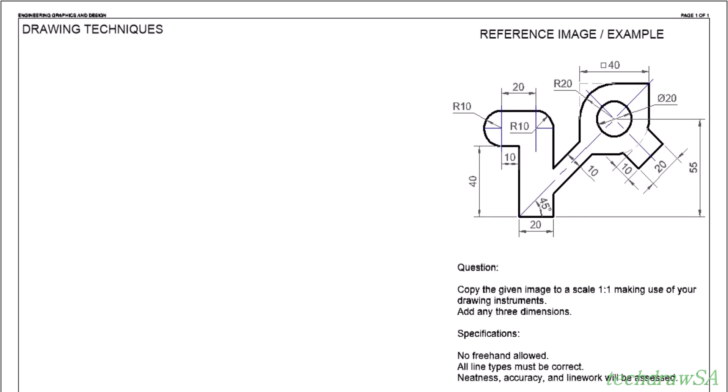This is another DoubleCAD training session, and you can also draw along with me on paper using your drawing equipment. You can use this as a CAD lesson for DoubleCAD, or you can use it as an additional exercise on paper. Let's start.

As always, we are going to make sure that our layers are set up correctly, and to do that we're going to go to Options and Drawing Setup. We have already spoken about these in previous videos, so you can go and look at my previous videos to see the default settings that I use. As they are set here, I'm going to leave them. Most importantly, I'm going to make sure I'm in the metric system, that my scale is 1:1, and that's an absolute type. Units is millimeters, everything is millimeters. For my purposes, I'm using a precision of 1.

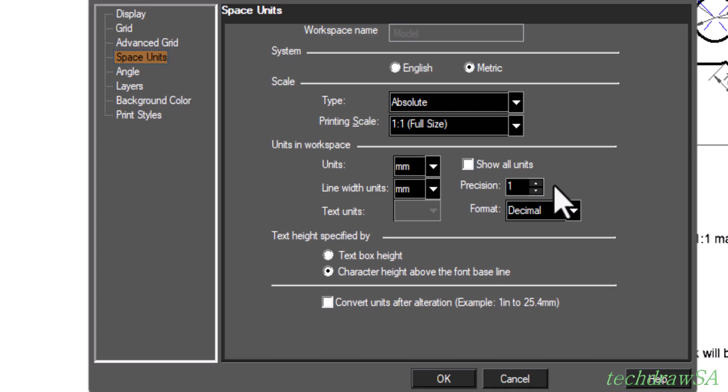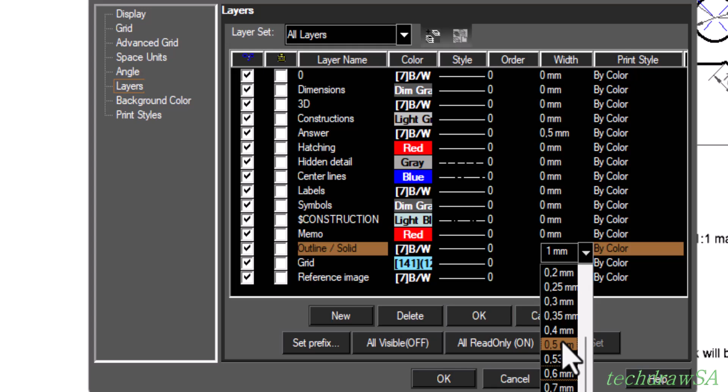Now I'm going to go to angles, layers, my most important part. Here I just check that I've got all the layers as I require them. As I've said in my previous videos, make sure that your outlines and your solid lines are set to 0.5. I set mine to 1 during this recording so that you can see the difference between my solid lines and my construction lines that much better. But for your purposes and for printing purposes, you will make use of a 0.5 line width, and I'm gonna say okay.

Here in our canvas, the one thing that you should start off by considering is the workspace that you have available on your paper. This template I've drawn is 420 by 297 to represent the outline edges of a normal A3 paper, so if I were to print this out onto A3 paper, my settings will be the same as that of the actual paper. Therefore, in our open space here, which we refer to as the drawing space, we must make sure that we will fit in our drawing both in the width or length as well as in the height.

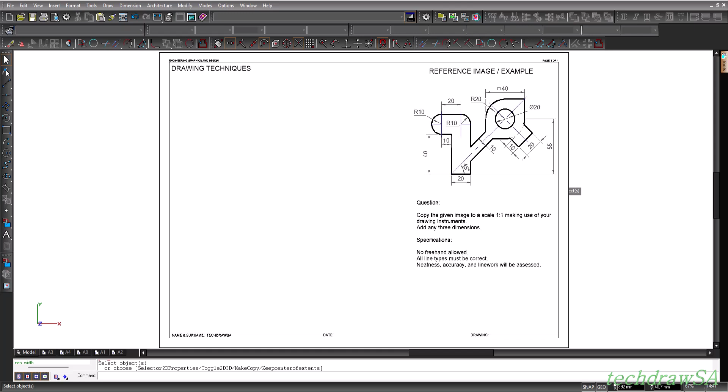If I look at my measurements given on my question, we can get an idea, although with some questions there are distances that would not give us the total length or total height, and you have to infer that from the information provided in your drawing. Let's use an example. If we look at the full length or width that this drawing would use up on our canvas, we can get a general idea so that we have enough space.

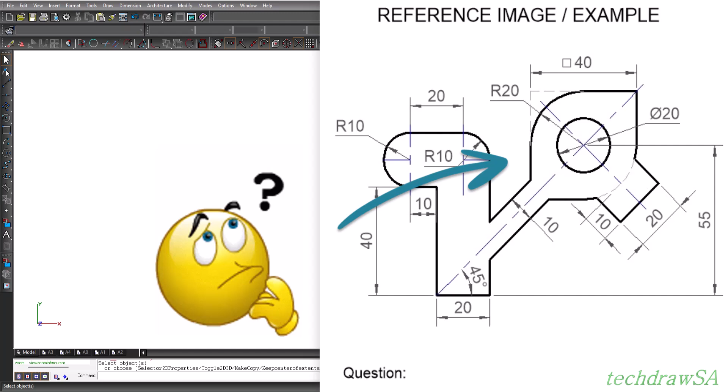Firstly, it's this 10 millimeters for the radius of this rounding, then another 20 millimeters for that elongated area, which gives us a total of 30. Another rounding gives us 10 millimeters, so 30 plus 10 gives us 40. Then there's a measurement here that is not defined as such. But using this angle and this height from the dimensions, we can get a general idea of what that distance could be, although we must estimate it for now. This could be anything between 15 to 20, and to be safe, I'm going to say roughly 20, although I know it should be a little bit less.

So we already have 40 millimeters from the dimensions provided, and now we add the other more or less 20, giving a total of 60 thus far. Then we have a square type shape defined as 40 millimeters, so that plus the 60 is 100. And then we have an extra bit here which we can safely estimate at least 20 millimeters. It might be less, but let's work with 20. So from the far left rounding to the far right corner, that's more or less 120 millimeters for the length or width of this drawing.

For the height, that's a bit easier. We have a defined 55 millimeters height up to the intersection of the center point of the circle. We know that the square is more or less 40 by 40, and we will then have more or less 20 millimeters from the center up.

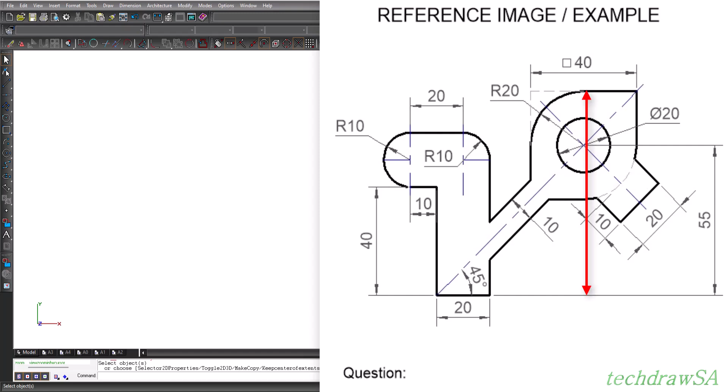So we can safely assume if we say 55 plus 20, we would get to 75. But let's be safe and give ourselves a little bit more room because we still need to add dimensions properly. And therefore, let's just make it for what it's worth, 55 plus 25, and that will round it off to 80. So we have a total length / width of 120 and a total height more or less of 80 millimeters. Those are the estimates that we work with for this.

So when we start our planning, we're going to start with a vertical construction line. We don't want to start too close to the border line. Now, I always say more or less 20 millimeters away from it should be safe. That gives us room for dimensions as well. So I'm just going to more or less place it there. And then I'm going to draw a horizontal construction line, also enough space from the top down to give me room for dimensions that I might need to add, and I plot it down there. Those are two light construction lines that I would draw on my paper as well as on my CAD canvas.

Now that I have a reference point to start off with, I'm going to use the circle tool as I always do for my measuring. And then from that intersection, I'm going to go and measure at least the 120 millimeters that I have more or less determined. That is for the total length, and that shows us that we have more than enough space on this scale of 1:1 that is required to do this drawing. And then the height, obviously, if we see that there's 80 millimeters, so we will definitely have enough space. So we don't even have to measure that out now unless you want to for purposes of starting from a starting point. So let's go about doing that very quickly.

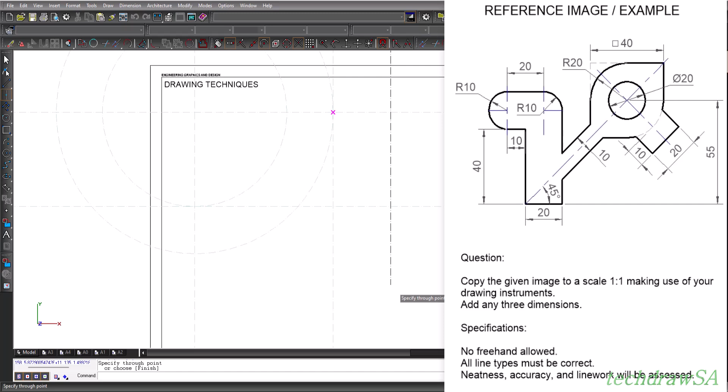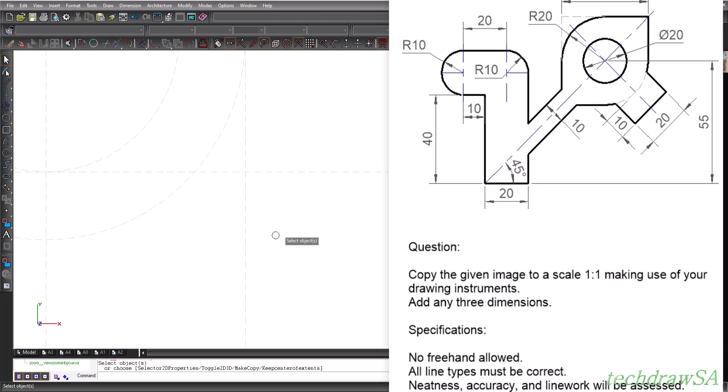So let's take a look at the question. In the question, it says here, copy the given image to a scale 1:1, making use of your drawing instruments and add any 3 dimensions. And then the specifications are that no freehand is allowed. Obviously, on your paper, you will have to make use of your drawing equipment. And all line types must be correct. So your center lines, your construction lines, your solid outlines, your hidden detail if required, dimension lines, everything must be the correct line types. And then finally, neatness, accuracy and line work will be assessed, as is the case in all technical drawings. And if we look at our reference image / example image, we now also have a very clear idea of where we will start and where we will end.

So for here, it actually depends on your preference where you would like to start the drawing. I like to look at what are common features that will give me a quick start and that will actually help me with my workflow to continue with my dimensions in an easier way. Now for me personally, you can find it a different way. There are 2 places where I think can be a good start in this drawing. Either the bottom left hand corner where this 45-degree center line starts, or the intersection here at the circle where our 45-degree center lines meet at the center there. That could also be a good starting position.

Now, in some exams or tests, those starting positions will be given to you and you will have to start from those. If it's a clear and open canvas like the one we have, then you can start wherever you like. Now, some people might choose other starting reference points, but I'm going to decide on one of those 2, and I'm going to for this purpose start with this one over here at the bottom left, because I have now easy access to this 45-degree angle that will lead me to the second part of the image, and I also have a starting point then for the rest of this first part of the image on the left hand side.

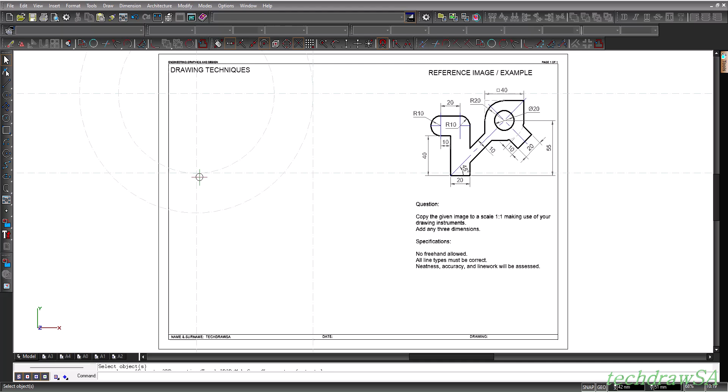So now if I decide to do that and start with the starting point, I need to look at my measurements to know from the measurements that I have determined here on the bottom left, how far must I go inward. So obviously if I were to go and draw a vertical center line here on that reference image, this distance from there to there is what I need to determine.

So that is easy because we already have that 10 millimeters up to the center point of that arc that we have there, and then there's a total of 20 up to that center, and from the proportions we can see that that's a 10 and 10 millimeters, which means we will have a 10 millimeter to the center point plus another 10 millimeters, and that gives us the 20 from the far left to that starting point. So for me that is a good starting point, since no other starting point has been provided.

So now what I'm going to do is, back here at my canvas, I'm just going to draw a light construction line, because I want to get rid of these other lines, because these arcs are going to interrupt and interfere with my planning. So therefore I'm just going to select the line tool, and I'm going to select the constructions layer, and I'm just going to draw a light construction line that is the outline or perimeter of my drawing for the time being. Remember, this is just an estimation. This is not necessarily the accurate distances.

And then once I've gotten that, I know that's my workspace in which I would do my drawing, and I'm going to go edit, clear all constructions. Now, not everybody will do it this way. Sometimes you will just draw a construction line to get yourself these two reference points on the Y and the X axis. That all is your decision.

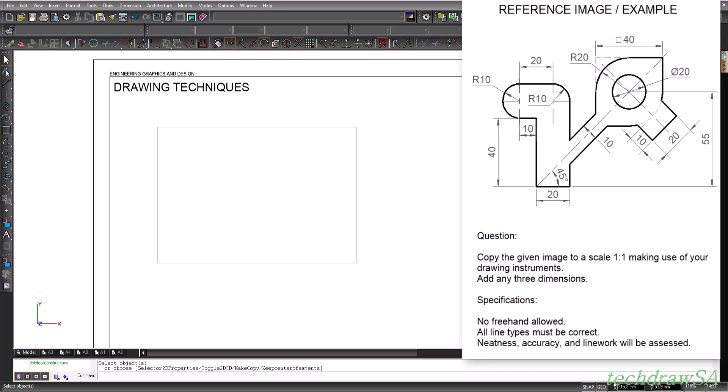So now that I have this far left distance, I know that I want to go increments of distances from left to right, and what I'm going to do is I'm going to plot construction lines from left to right for this first part of my reference image on the left hand side. And for that I'm going to go to my circle tool again to measure off. I'm going to measure off 10 millimeters, and I will do that a few times more. So we have 30 there.

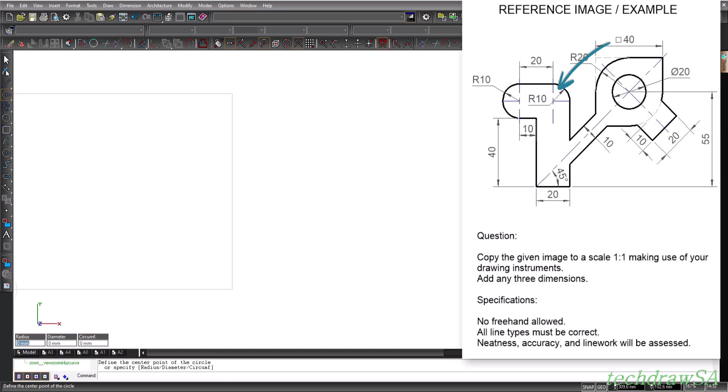If we look at our reference image, there's the first 10 millimeters, the second 10 millimeters, and then I need another 10 millimeters to that center point of this round arc here. So that means 10, 20, 30, 40 in total. So I'm just going to do those for the time being, not too many. Just want to use the necessary construction.

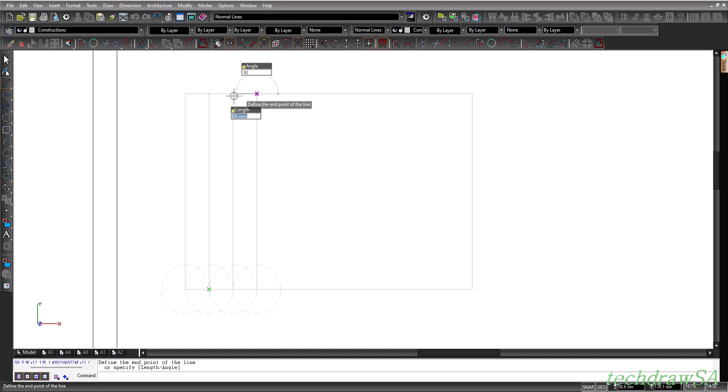So now that I have those reference points, I'm going to go and draw in light construction lines, vertical construction lines. That is going to just be my guide for when I do my measurements. So I don't need all these lines or the full length of those lines, but for the time being, this is just the way I like to draw and plan out my layout of the drawing. Once I have that, I know I've got now the 10 millimeters.

This is just to help improve my workflow, and immediately when I've done that, I just want to remind myself of this 45-degree center line that I have. That's going to go indefinite for the time being, and that starts at this 20 millimeters from the far left inward. So therefore I'm going to go here to where that line is. I'm going to select my line construction tool, and I'm going to immediately select the center lines layer. So that is then on this reference point, and I'm going to zoom in properly so that I can snap there, and then let's zoom out.

I'm going to just stretch it indefinitely for the time being, and my angle I'm going to say is 45 degrees, and I plot it down and escape out of that. The properties of the center line I will adjust later when we reach that stage. Now I know that's there, and I know that I can start with the left hand part of my drawing.

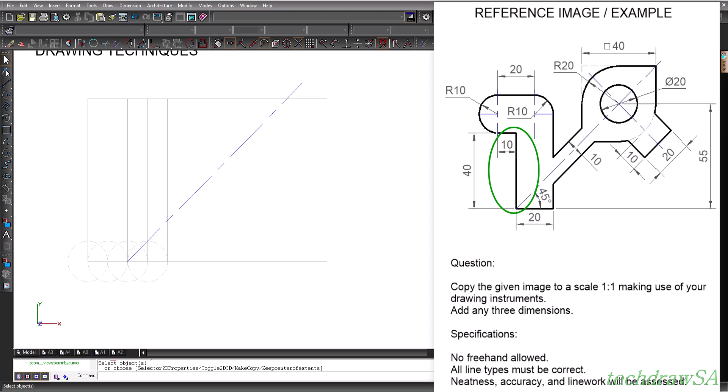And for that, I know there's a solid baseline of 20 millimeters that starts from the starting point to the right, and I've got the 40 millimeter height. That also is a solid, uninterrupted line upwards. So for that, I'm going to measure out that 20 millimeters as a solid outline. So I'm selecting the line tool, and then I'm selecting my correct layer, which is my outline and solids layer. So from that starting point, 20 millimeters to the right, and I escape out of that. So there I have the first baseline.

Now I want to go 40 millimeters up as per my reference image. So if I look again, always double check that you are using the right measurements of 40 millimeters, and therefore I'm again going to use my construction tool, circular construction tool, to measure the height of 40 millimeters.

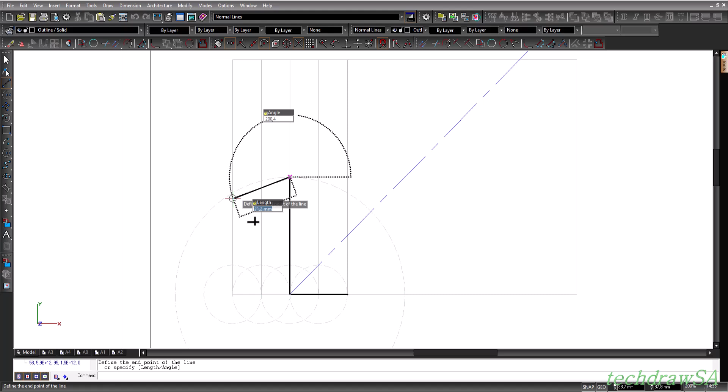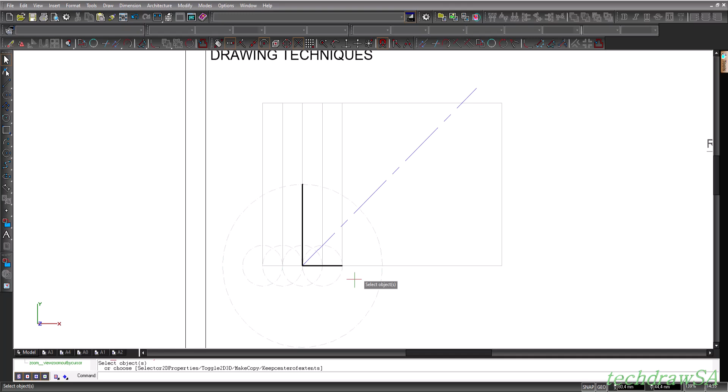Once I have that, I can immediately go to my line tool and immediately measure that height of the line and escape out of that. So there I have two solid outlines already. Now remember, you would draw this on a 0.5 millimeter thickness on your CAD, and on paper this will be a nice solid outline, A-type line, and then you can draw this either following me here on CAD or on paper. Now let's go to the next distance.

The next distance is straight out 180 degrees at a distance of 10 millimeters at that 40 millimeter height. You can either draw the guideline for your construction here, or you can just draw the 10 millimeter solid line, which is what I'm going to do. By the way, if you have your selection active and you have your line tool active, make sure that you are still on the correct layer.

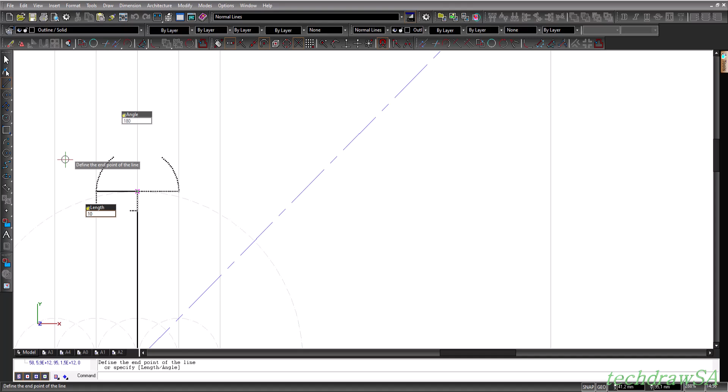And if you want this line to go out straight horizontally, you just hold in the shift key and just drag. And then once you are happy that's the right angle, which is 180 degrees, you can just put in the distance of 10 millimeters and enter. There we have that part now, and I'm going to escape out of that. So now I've gotten all of this so far.

Now we reach the point where we actually have an arc. And we know that arc has a radius of 10, which means it's a diameter of 20, which means that from this line here, we will have 20 millimeters up to the top. And that means that we have up to the center only 10 millimeters, so we can determine those distances already.

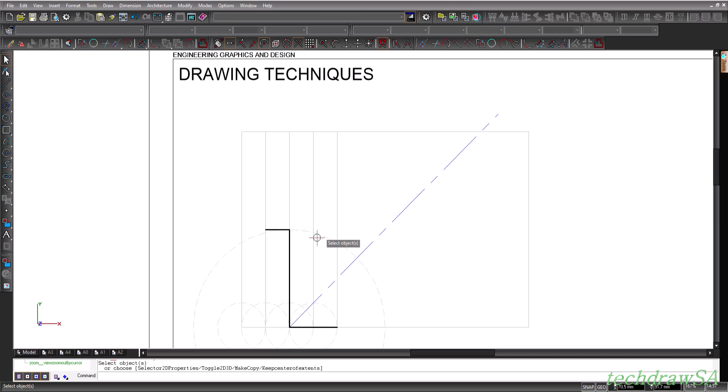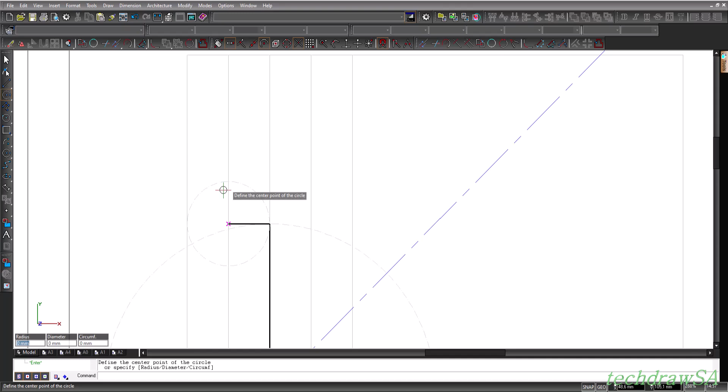So coming back here to our answer, I'm going to measure now on these guidelines, and this is part of the reason why I like to draw these light construction lines as guidelines, because in CAD you always need reference points, and this just makes my job a bit easier. So I'm going to go to this reference point here, and I'm going to measure up 10 millimeters as a radius for my first measurement, and then 20 millimeters for the total height of that round. And that gives me a reference point for the center point as well as the top.

Once I have that, I'm going to make use of my horizontal construction line tool and use that as a guideline for the time being. Place it there, snap it to those reference points, and then I'm going to use my line tool. I'm going to make sure it's on the constructions layer, and I'm going to draw two light construction lines out to the right, indefinite in length. And I'm going to do the same with the uppermost part, also out to the right, indefinite in length. We're going to clear that up later.

Now that I have that, I know this will be the center of my rounding, which is the center point that I see here on my reference image. So I'm going to take that middle point, and I'm just going to draw in that 10 millimeter radius arc. Now that I have these distances for the rounding, I know it's 10 millimeters to the center point and then another 10 millimeters to the uppermost.

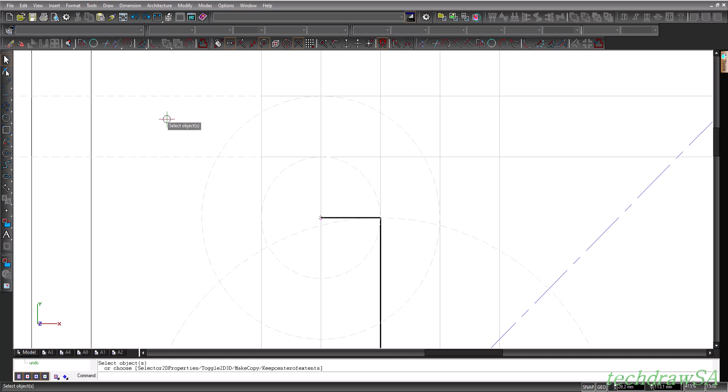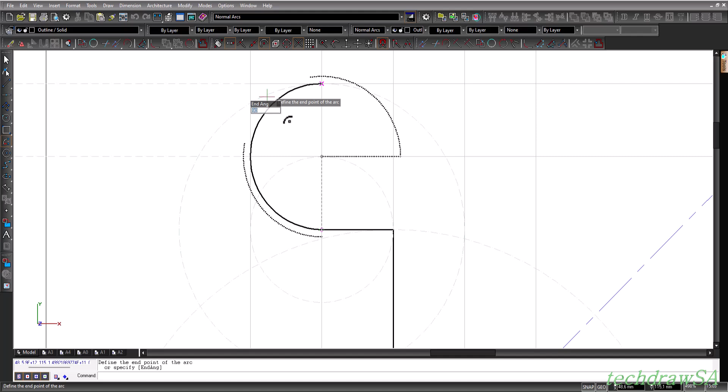So I'm going to go to my arc tools, and I'm going to select this one that says center start end, and I'm going to move onto that intersection, make sure that I zoom into it and that I snap to that center point. Once I have that, I'm going to go to the uppermost part because it's going anti-clockwise, and I'm going to draw in that solid outline of the rounding and snap off that.

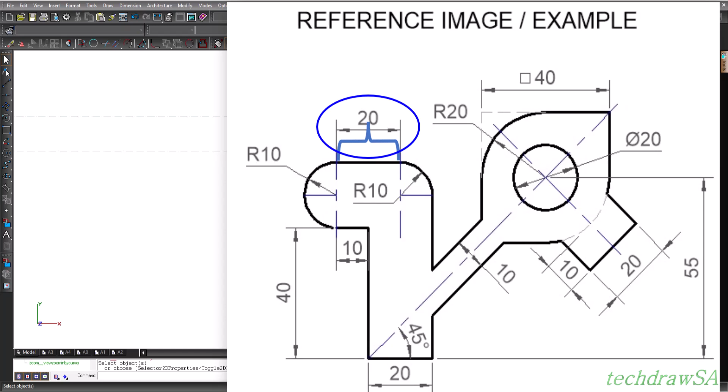Once I have that in place, my rounding there is done with a radius of 10 and a diameter of 20 millimeters. On my reference image, I now have the next flat line that is 20 millimeters before it then creates another round of a radius of 10.

So let's first draw that flat line, and for that I'm going to use my line tool and make that active. Make sure I'm still on the right layer, and by the way, always make sure your layers are set by layer, all the properties and functions of that layer, as I've mentioned in my previous videos. So now I'm going to draw that line of 20 millimeters, and then I escape out of that before we start with the next rounding.

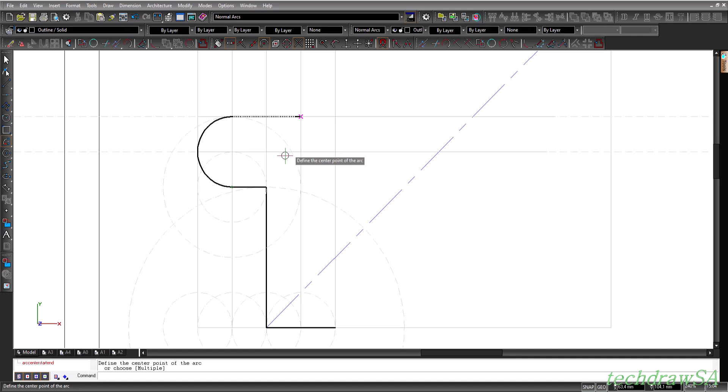Next, I'm going to go back to my arc tool, make sure that I've got my center start end arc tool selected. This is the reference point for that radius of 10. It's anti-clockwise, so I must go to this reference point over here and draw in that quarter arc around there. That gives me that rounding. And now this part here, I can draw it solid and trim it later, or I can leave it as a construction line before I continue with this diagonal part of my drawing.

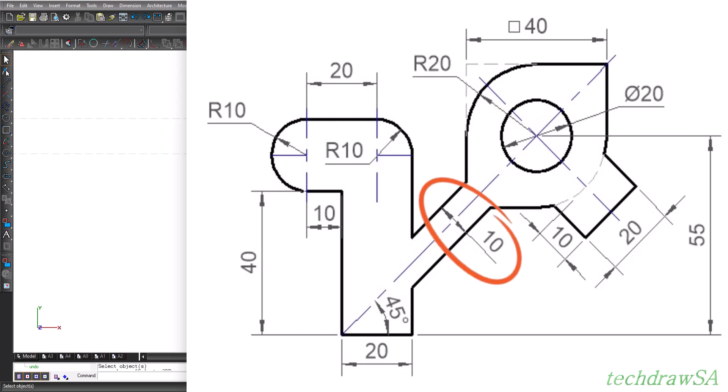Let's take another look at our reference image. On the right, we see this neck part that is 10 millimeters, and therefore I'm going to measure 5 up and down from the center line. Back at our image, I'm going to first clear all the clutter by going to edit, clear all constructions. And now I'm just going to draw perpendicular to this center line a reference line. I'm going to delete it later. I just want to use that as a reference.

Let's do it on the constructions layer. I'm just going to draw that 5 millimeters, to create a distance 5 millimeters away from the center line. I could have used other methods as well. I could also have drawn in a light construction arc or circle, and then just extend that to intersect with our circle here.

That will give us the two reference points 5 millimeters away, because in DoubleCAD, this free version, there is not a parallel construction tool, so we have to improvise a little bit. However, in the Pro version and in TurboCAD, you do have those tools. There are several ways that I can get a parallel line to this center line. I can use this tool over here and just click on that reference point and say 45 degrees, enter, and escape out of that.

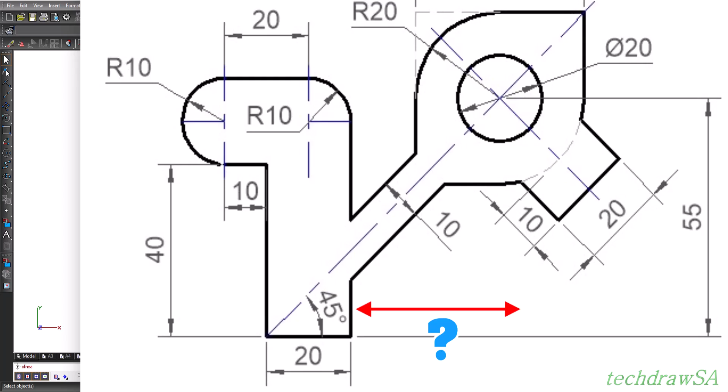Now you can follow the same procedure to determine those distances on your paper. Remember, you draw the same on paper and on CAD, so you can use the same procedure. Once I have that reference point, I draw the 45 degree center line that is perpendicular to the one I've already determined through that intersection there.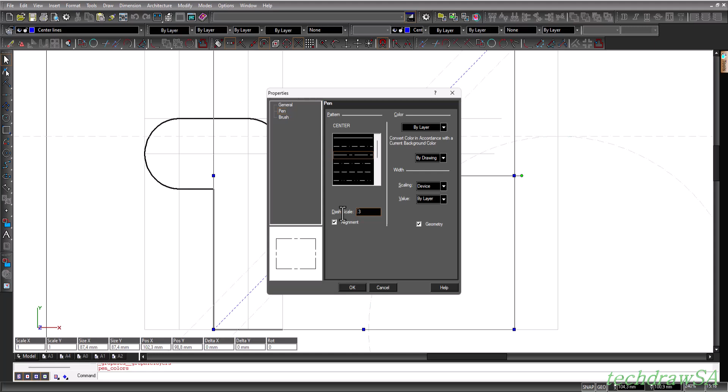I want to make the intensity on the center line a bit better. So I select that line, double click or right click properties, go to pen, and I'm always selecting segment. We use the third line from the top, which is our center line, and I change this to 0.3. You can change it to anything else if you like. Then I click off of that. Now I see that line and the intersection a bit better. There are also different ways to create this perpendicular 45-degree center line that we have on our reference image.

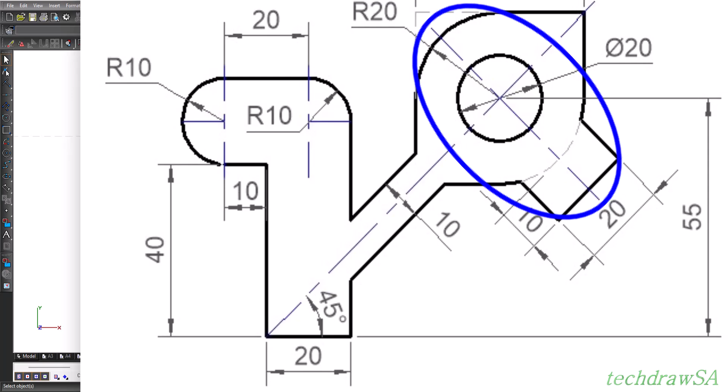So to get this, there are several ways to determine that perpendicular to the long center line. So that's what I'm going to do next. From that reference point, I'm going to go to my construction lines tools. There's different options. I'm going to use this one, and then I'm going to select anywhere on this line because I want to draw perpendicular to it, and then I'm just going to make sure that I snap to that intersection of that 55mm height and 45-degree angle and create that reference point.

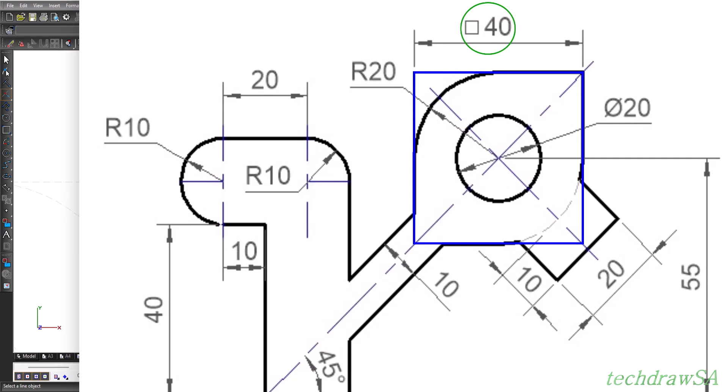Now you can already determine the extent of this if you want. It all depends on how your workflow and procedure is by your choice. Here we see that is a box of 40 by 40 that is around this center point, and that there's just been a rounding created to cut off that square box, and then there's an extrusion on this side and also a little bit of a rounding that remained.

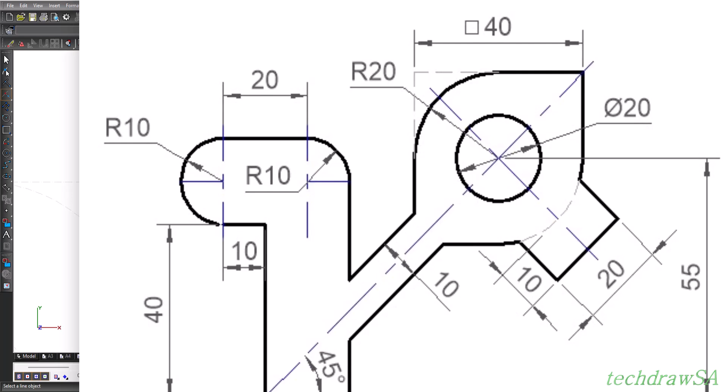So we can do this in several ways. So you can also draw the circle in the middle that has got a diameter of 20, whichever is your preference. So what I'm going to do is I'm going to use that 40 by 40. Now to do that, we are going to use our circular construction tool once more, and we are going to go to that intersection here, and I'm going to draw with a radius of 20 millimeters a big light construction circle.

And if you are drawing on paper, you obviously could immediately have gone and drawn a light construction circle, and therefore I can do that here by going to my construction layer using my circular tool, and I can do the exact same thing as you would have done on paper. It's your preference. So there we have a light construction circle, which shows how I got to my answer. So that is this circle that I have here as a reference that fits inside of that square box that has now been deformed.

Next, on our answer, we can now decide if you want to draw the construction lines of the square box first, or if you want to do the deformation, or if you do want to do the circle. Well, for me it just makes logical sense to first draw the box, because I know that's 40 by 40 and I have to deform it by applying a certain function.

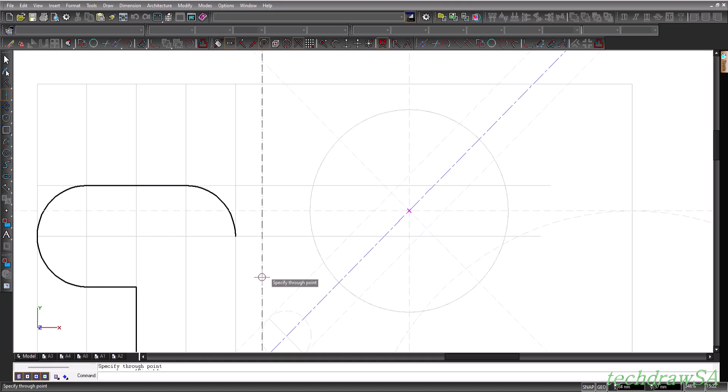So what I'm going to do is I'm going to go to the construction tools and use the vertical construction line, and through the center I'm going to just draw a vertical construction line to give myself a reference at the top, the uppermost part of that curve. And then I'm going to draw a horizontal construction line over there at the top and at the bottom. And I'm also going to go and draw a reference line on the far right edge of the circle and the left edge of the circle. That will create for me the square box that I will need to manipulate as I continue to do this drawing.

So once I have that, I'm going to use my line tool and I'm going to select the constructions layer, because I want to do a construction and planning first. So of the original shape, which is the square 40 by 40 millimeters, I just want to zoom in and make sure that I have the right corner there.

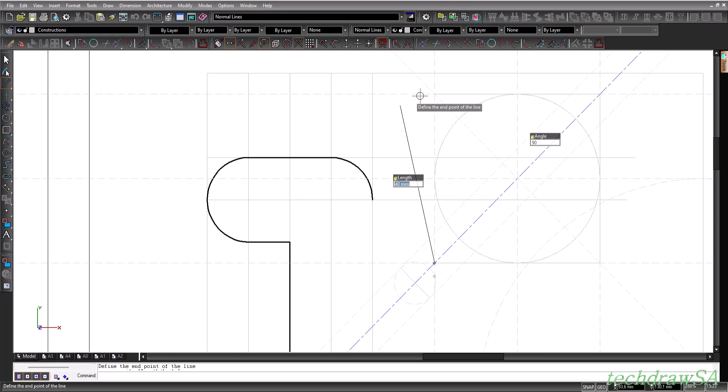And I can either now, as you've seen in the previous videos, right click and say close, and it immediately will close that end. But if I say finish, it will not close it and I have to draw that line again. So this time I'm just going to say close, and it closes it off to the first reference point. But please remember, it's only once you've activated the second last reference point that you can then right click and close to close off on the starting point.

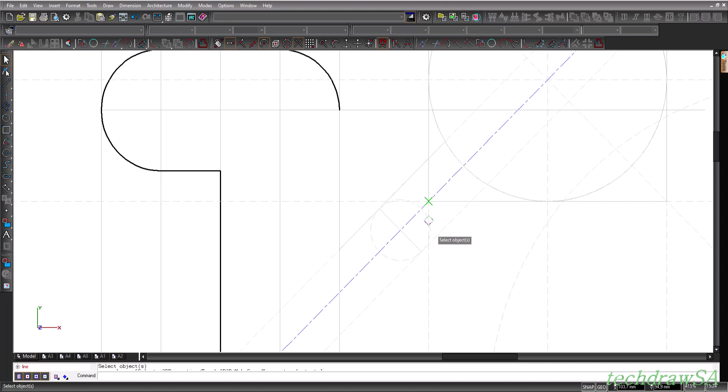Before I clear all the construction lines, I want to draw in this neck part's construction lines as well to give me some guidance for later on. So I'm still in the construction lines layer, and I still have just the construction line tool active, and I'm just going to draw a line from here to there and escape out of that, and I'm going to again select that line tool, and I'm going to draw from there to there and escape out of that. Now what I want to do is I just want to draw in a line here as a center line.

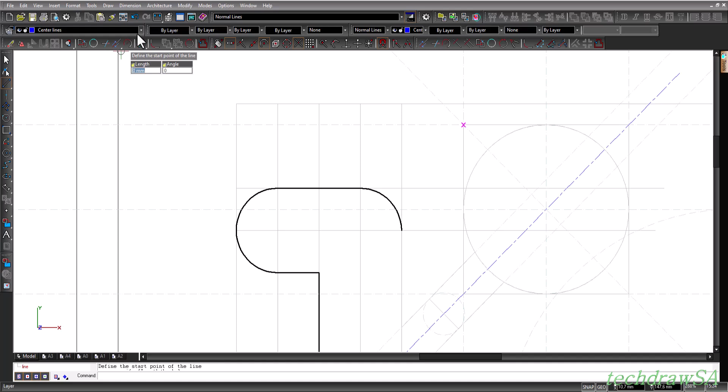So I'm going to select my line tool and make sure that I'm on the center lines layer, and I'm going to draw a center line from that corner to that corner, which is perpendicular to the first center line that I've had. And I can change the properties now or later.

I want to change it now, so I'm going to select that line, double click on it, or right click properties, go to pen, make sure it's aligned, make sure that is set to 0.2 or 0.3, whichever you prefer, and also make sure it's the third one from the top, and then press OK. Now I've got that center line set up the correct way. I will also lengthen those lines later to the correct length.

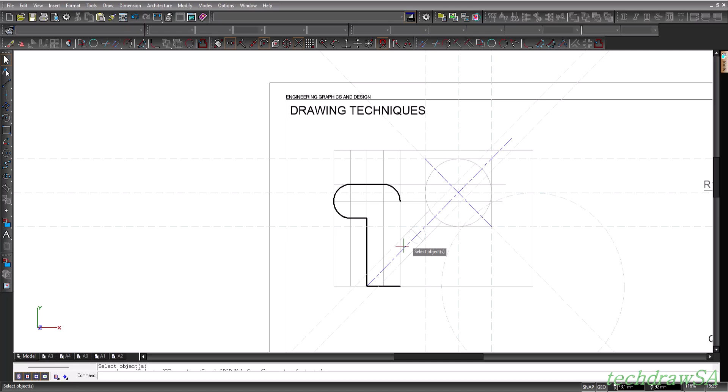Now that I have gotten all the reference lines properly set, I can now clear the construction line. So I'm going to go to Edit, Clear All Constructions, and now I have this, and you will see this on your paper drawing as well. And now everything is a bit clearer, and we've cleaned up our canvas.

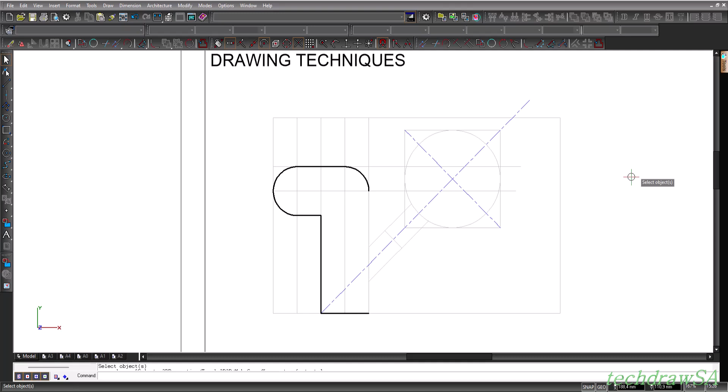Next thing that we want to do is see if there's anything that we can draw in solid at this stage or not. So we go back to our reference image, and we see here we can draw solid, and there we can draw solid. Here where the neck part intersects with the square, and over there we can also draw those parts solid, and then we'll get back to the rest after that.

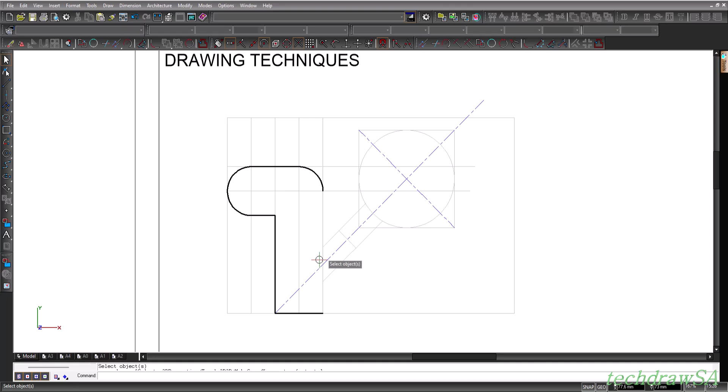Now on here I'm going to select my line tool. I'm going to select the solids outline layer, and I'm going to draw in solid that part over there. I'm going to zoom in to make sure I snap to the correct reference point, and I'm going to zoom out, and I'm going to snap to that intersection, which is the outer edge of that square construction, and then I'm going to escape out of that.

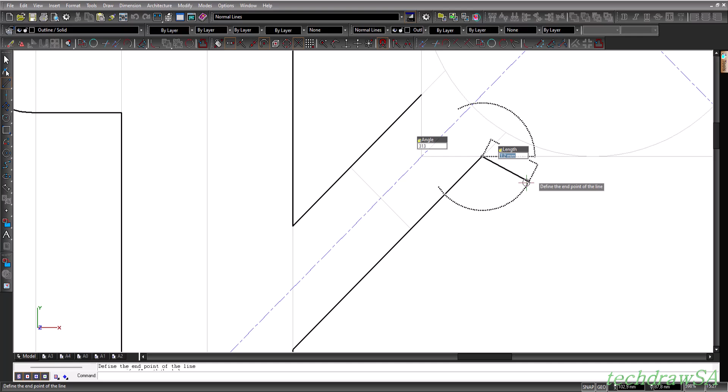Then I'm going to select my line tool again. I'm going to snap to this bottom reference point, snap there, zoom out, zoom back in on that outer edge of the square construction. Now you can continue drawing, but there are features that we still want to draw, so I'm going to first escape out of it and do one thing at a time.

Now that I have this, our shape is taking on good form, and we want to make sure that we get all the deformation or the detail on the square part set correctly. So we're going to go to our reference image and see that here we have a rounding that is a radius of 20 millimeters. So we just need to make use of this center point over here, and this center point is a universal center point for many of the features given here, and we want to use that radius of 20 to that arc from that center point, and then we also will use that same arc over here.

So I'm going to draw a construction arc that is a light construction here at the bottom, because it's very easy to miss that little bit of rounding over there and over there. That's a sneaky one that you have to be aware of, and the one at the top is obvious. And then we will do the extrusion after that. So let's go back to our answer here. So here we have a radius of 20 already set, so we just need to draw that solid.

So we're going to go to our arc tools again, and we're going to use this center start end reference tool. So we are going to use this intersection and center point, stretch to the outer edge at the top, 90 degrees straight above, swing it around to 180 degrees to our horizontal reference point and snap off on that. This one is already construction arc. We will finish those small little curves later.

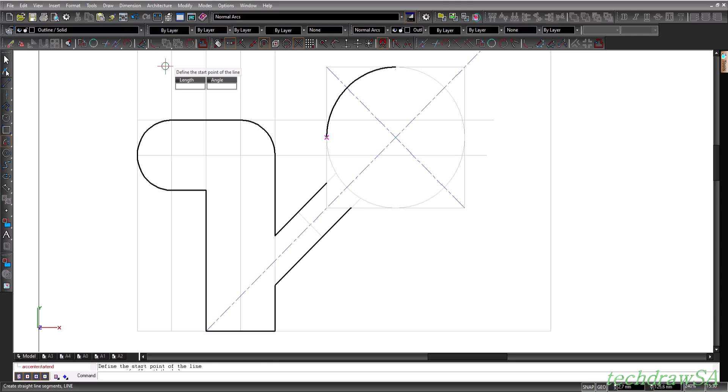And then we see we can draw in that solid line over there. And we can also draw in those solid lines at the top. So let us select the line tool, and we make sure we are still on our solid outlines layer. From that reference point, draw a solid line there and to there, and escape out of that. You obviously would do the same on paper. I will also draw this one over here to finish that off and go back to our reference image.

So we have now finished those vertical and horizontal lines. That arc, if we were to draw it first, just to be sure, you could draw a light construction line so that you have that reference point. But if your snaps are set correctly, it will automatically snap to those points.

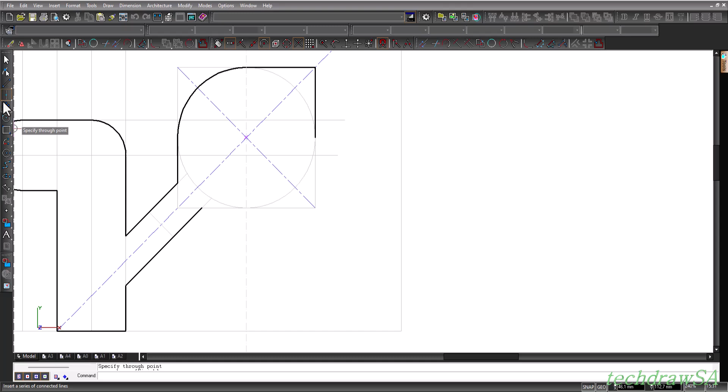But on paper, you can draw in that light construction line as a reference. And now I can also use my line tool again for the solids outline and draw a solid outline to that reference point and escape out of that. And now we have everything that we could do up to there.

We could draw the solid circle on the inside just to get our mark. So let's do that. That's a radius of 10 or a diameter of 20. So let's draw that in from the center point. So I'm going to select my circle tool. I'm going to make sure I'm on the outlines layer. And on that reference point, I'm going to go and say a radius of 10 or a diameter of 20 and draw that in solid.

Now we're almost done. We will see there's a distance of 10 millimeters from the outer edge of the extrusion. And we will see that the total thickness of that extrusion is 20 millimeters, which means 10 millimeters to the left and right of that center line. Back at our image, let's use now our measuring tool again, our circle construction tool. Anywhere on that line, we're going to just create a reference of 10 millimeters.

And once we have that, I'm going to use the perpendicular construction tool just to get myself a reference point on there and there. And then what I'm going to do is click on that same one there to get that parallel line to the center line. And I will select the perpendicular tool again, select any of those lines parallel to the center line. I'm going to draw another construction line that is a reference line so that I can do the extrusion.

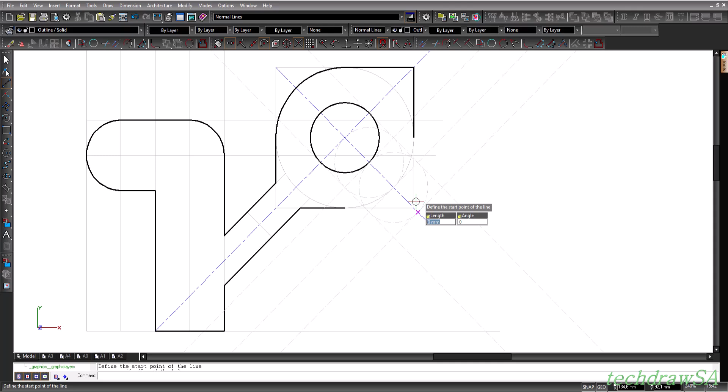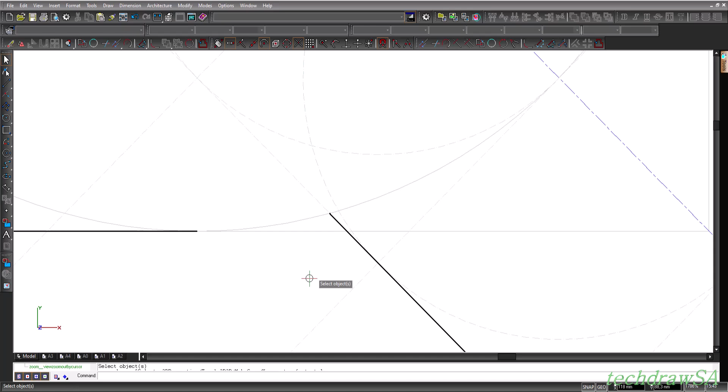And once I've done that, I'm going to zoom in and I'm going to draw. You can start anywhere. You can either start there at the intersection, wherever you like. I'm going to start at this corner here and draw back towards that intersection there and make sure that I snap to the right place and escape out of that. On paper you will do the same. Also just make sure you use the right reference points.

Select the line tool again and I'm going to draw that part and then zoom in on that arc's edge there to that reference point. And once I have that, I'm going to escape out of it and that will create that part. Now I can see the part of the arc with my compass. I can just make that arc solid and also make that part solid with my compass. And I am going to use on my CAD this tool over here that we've been using, the center start end tool.

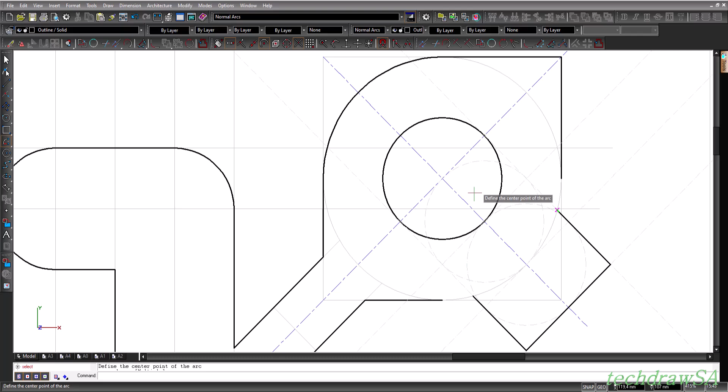I'm going to go and place my compass on the center of my shape and I'm going to just draw in, and remember it's going anti-clockwise, so I'm going to start here and draw in that solid part, and then I'm selecting that same tool again and move to the center point once more and zoom back to that part that I need to fill in an anti-clockwise direction from that snap to that snap, and then I can zoom out of that, and that gives me the outlines of my shape.

And now I can go edit, clear all constructions, and this is what you will see on your paper as well. Now again, I say some of these constructions you would not need if you are drawing on paper, but on CAD you need reference points, and hopefully you can understand and see why I am drawing so many reference lines, because I need reference lines and reference points to snap to, otherwise my snap tools won't work and I can't work accurately.

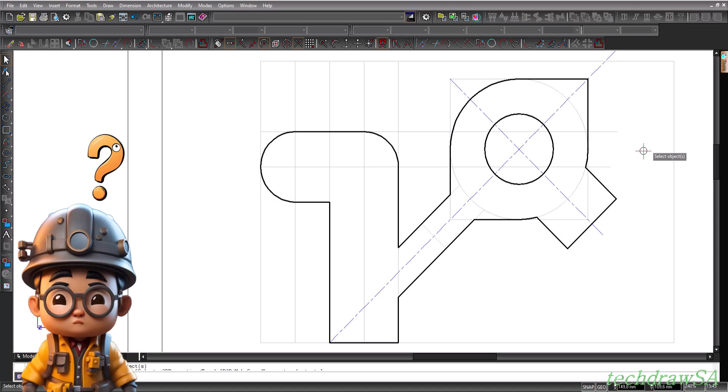Now again, there are also many different ways to approach it, different ways that you can start your drawing and end your drawing, but you have to decide which workflow works best for you. In this free version of DoubleCAD, you are limited to how your tools work, so every time you have to go back and select the tool that you want to use, which is cumbersome, but as you see, you can easily overcome that if you're just diligent and persevere.

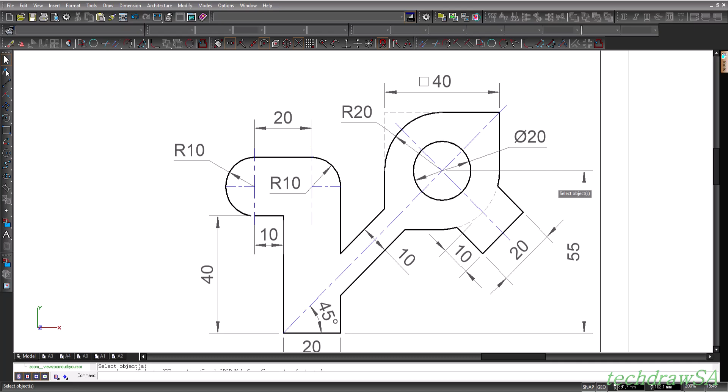So let's see what else we need to do. Our drawing outlines have been done. We have done most of our center lines except these center lines that we have here. So let's go back to our drawing and let's draw in those center lines as well. We do not have to show those hidden detail lines that are here because they just represent the original shape from which we derived and used our measurements, but you can draw them in if you like.

Now what we want to do is just firstly create those center lines. So I'm going to use my line length tool, select the center lines layer, and I'm going to draw in the first center line over there, escape out of it, select the line tool again, it's still on the center lines layer, and draw that center line, snap there, escape out of that, and I will do the same on this side and escape out of that. Now we have those center lines.

As I said, if you want, you can change these lines to hidden detail. That is your decision. Let me just show you how to do that. I go to my selector tool, and now it's just a construction line. If I select it, it will select the whole line. I don't need the whole line, but this is anyways at the back. So what we want to do is change it on our layer settings directly over here to hidden detail, and if I click off that, you can see there's a hidden detail. Now if I zoom out, the intensity of that will change, and you can then change those properties the same as you do with a center line.

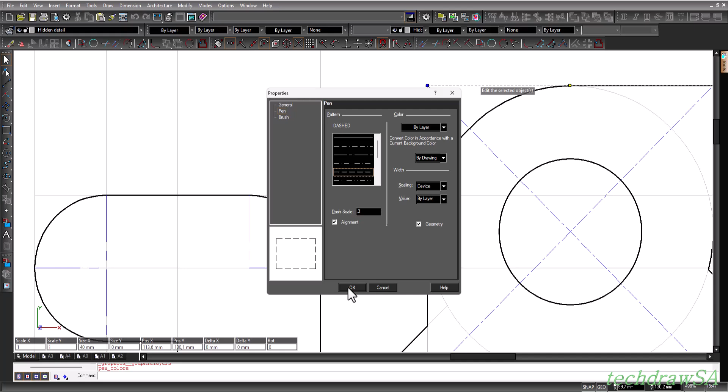You can also do the same effect with a hidden detail by double clicking on it or right clicking and same pen properties, and then I'm selecting the pen tool. I'm also going to align always, set the dash scale to 3, and from the top, hidden detail is the fifth line here. It's 1, 2, 3, 4, the fifth line here that I always select and say OK. And now there you have your hidden detail line, a better intensity. You can do the same here.

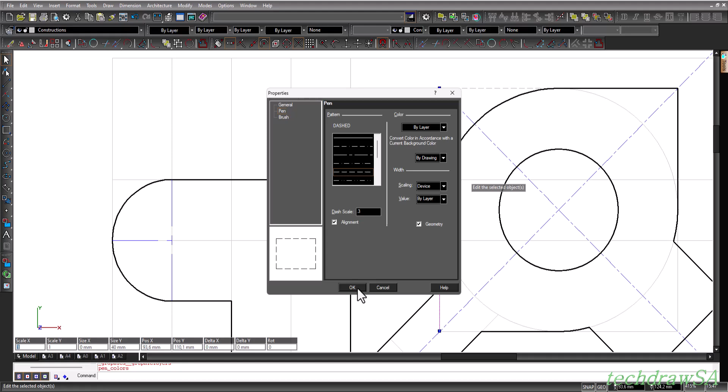So let me just select that again, click on it, and now I'm going to do the right click properties just to show you that it gives you the same result. Go to pen and you will select the fifth one from the top, dash scale to 3 or whatever you prefer, select OK. And remember, as I've said in my previous videos, I use these settings to get the best print out result on paper. If I were to take this drawing, convert it to PDF and print it out on an A3 printer, these are going to give me the best printing previews and printing results that I want.

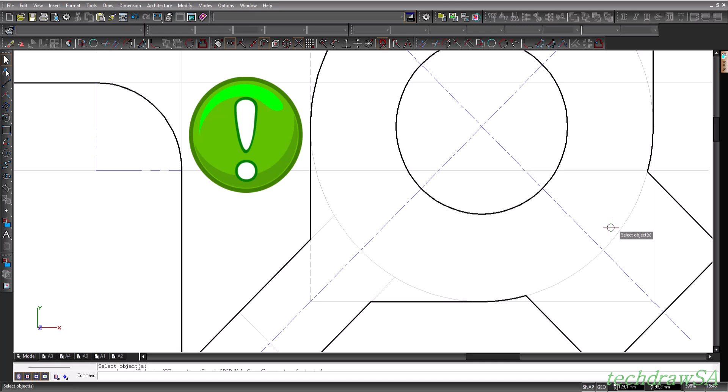If you want to do the same for the circle here, it's now one entity. You first need to split it if you want to create a hidden detail effect for this line here in CAD. On paper, you obviously will just draw in the hidden detail. But let me show you how to do that as well. So I'm going to use the selector tool. I'm going to select that line, and you see the whole circle is selected, and I don't want to do the whole circle as a hidden detail. I only want that part that I have there.

And then I will go to my split entity tools, which we spoke about in previous sessions, select that line, and I will split it off over there, and I will split it off over there. Now that's active, and I go to my selector tool, and now that I have cut that off, you will see only that segment of the arc is now selected. Now I can go to my layers panel and I can select the hidden detail layer. I can immediately go and change the properties because I know it won't be like I want it. So I'm going to go to pen tool, select align, make it 0.3 and make sure it's hidden detail.

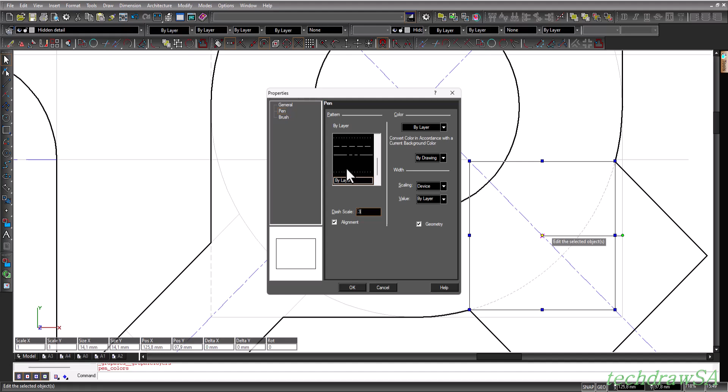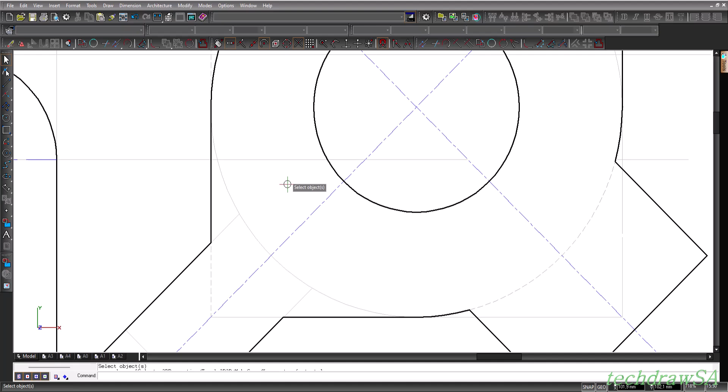So it's the fifth one from the top. Say OK. And now you will see there I have a much better intensity on the hidden detail. And because I set align, that start and end of my hidden detail will come from and flow out of those outer edges. So that's how you do that as a bonus.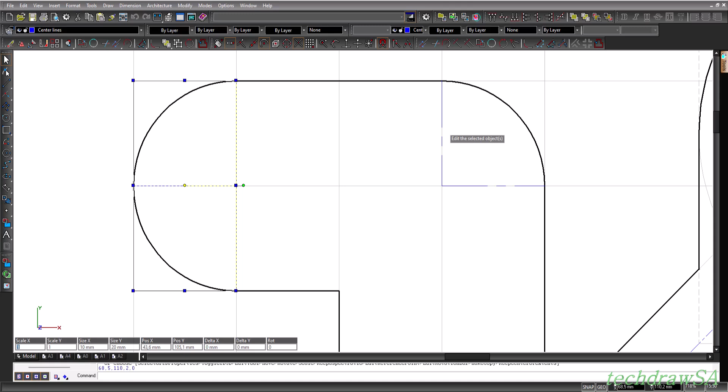And now what I need to do is just finish off these center lines because we haven't finished that off properly. So let's go to the center lines, select the center line, each one of them. If I want to have multiple center lines selected simultaneously, I click on the one and then afterwards I hold in shift, I select the one that I need, and then I keep on holding in shift, and I will continue to click on the lines that I want to manipulate.

And if I want to now change that, I can double click on this yellow dot or right click on it and say properties. Once I've done that, I go through the same process, go to pen, I go and change my dash scale to 0.3, align, and now remember it's a center line, so I'll use the third one from the top and say OK. And then I click off of that. And there we go. Now we have that.

And some of you might say that I can't see my center lines properly because I have my construction lines there in the background. Doesn't matter, on the printout it will clearly show. But if you want, you can go and either delete those construction lines, or you can just put them on the back layer by selecting them.

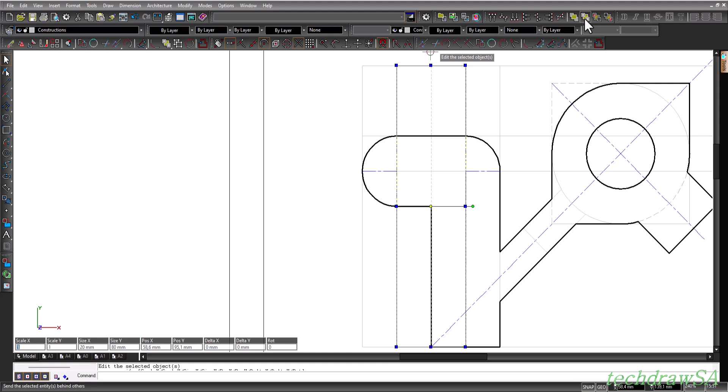And as I have set my toolbars here at the top, I've selected these functions on the toolbar. So this one says send to back, same as shift page down will also send it to the back, and that will just make sure that it is behind my center lines. So on the printout I will see my center lines properly, or if you still don't have the desired effect, you can just go and select those lines and delete them. I'm going to leave it as it is for now.

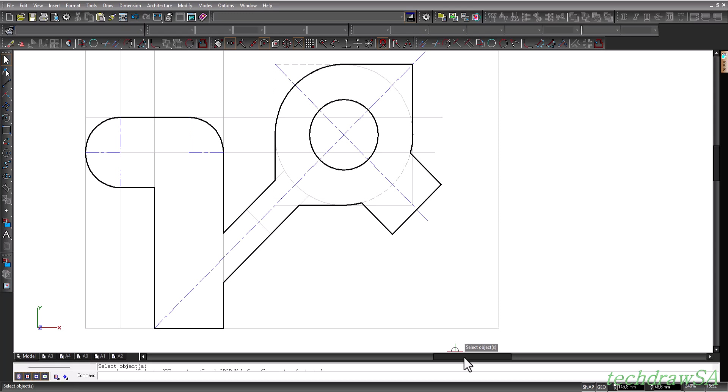Almost done. I'm going to show you the dimensioning, just some of the dimensions very quickly. Let's take a dimension, let's say for a radius, we take a dimension for the length of something, and then for the degrees. Let's do that so that you can see how to do that. So let's use this one for the height. Let's get the dimension for the height. Now on paper you obviously will draw this in yourself, but here is a tool on CAD, as you would have seen from my previous videos.

For this I'm going to use the orthogonal dimension tool over here, and I want to measure the distance from that height to that height. So I'm going to select the first one, and let's just use the bottom line, and then I'm going to use that line there, and I'm going to just drag it out. But now you see it's still on the center lines layer. So while this is active, I can just go to my layers tool and immediately go and select my dimensions layer, and there we have it.

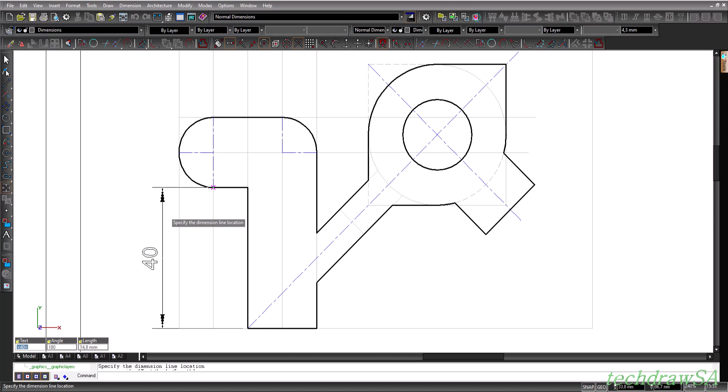We have our dimension. Now you will see there's that 2mm gap. You can't really see it over there, but if I zoom in, you will see there is actually a 2mm gap for the leader lines, and that will give us the first dimension. Now let's do a diameter. Let's use this circle, this full circle.

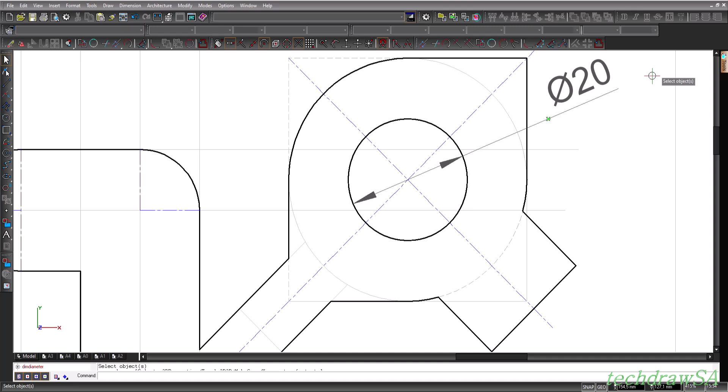Now for that I left click and hold on this tool here for dimensions, and then you will see there's for radius and diameter. I'm going to select the diameter in this case, and I'm going to zoom in and click on the edge of my circle, and then I'm going to drag my mouse. You see how far I can drag it? That's how far this leader will then pull it out. Let's say that's where I want it more or less. Once I click on that, you will see the dimension is in a straight continuous line out there. We will change that now so that it is horizontal.

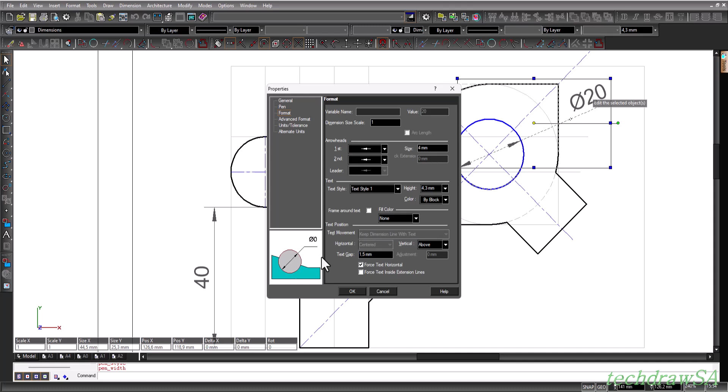Let's do that. I'm going to use my selector tool. I'm going to double click anywhere on that dimension, or you can say right click properties, and then you go to format. At format, you will be able to change here where it says force text horizontal. If you click there, you'll see in this preview, it shows you that that is forcing that text to be horizontal. If I click OK, you will see that take effect here on your answer.

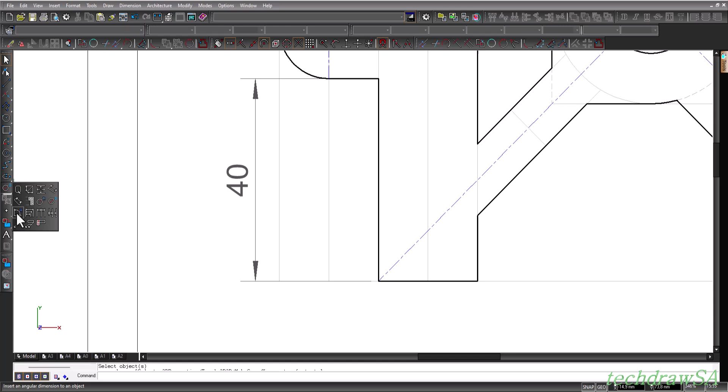Let's look at the angle. So here at the bottom, I can put in the degrees of 45, or you can take any other angle you like, but I'm going to go to my dimensions tools, and I'm going to select here my angular dimension tool. With that active, I'm going to click on the first angle and then also on the second angle, because at first nothing happens, but if I click on the second angle and I select to which line I wanted

to show the dimension, I am going to get this result, and I can again make it as large or small as I want. I can have it even on the outside, whichever, but I want it on that side, and I click on that, and that gives me the degrees over there. And that shows me how to do the dimension on this drawing as well, using my basic CAD functions.

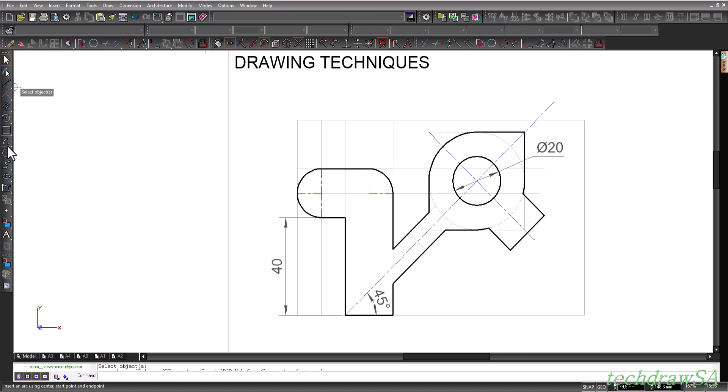I'm not done yet because my center lines are not stretched to the correct length. So as you know, I like to make sure that my center lines are also proper. So I'm going to go to my construction circle tool, and here at the top I'm going to snap to the center, and I know that that radius there is about 30, but I want to make it a little bit bigger, so I'm going to say 33.

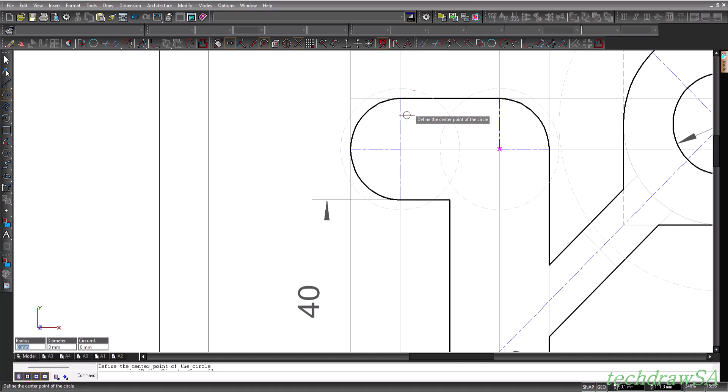And also with these I want to make it slightly bigger, so I'm going to make that 12. And for this one also, I'm going to make that 12, just slightly bigger, so that I have those center lines extended just past the outlines of my drawing. And then, once I've done that, I'm going to use my line length tool.

Now, unfortunately, in DoubleCAD with this free version, once again, every time I have to click on a line length tool for each and every line that you want to lengthen. So just be patient and go through the motions. So I'm going to select that line and then drag it to there, select the line length tool, and then drag that again. I can do it past, and this is if you don't have a second reference, so you just come back to it again, and then you do the same with the others. Every time selecting the line length tool.

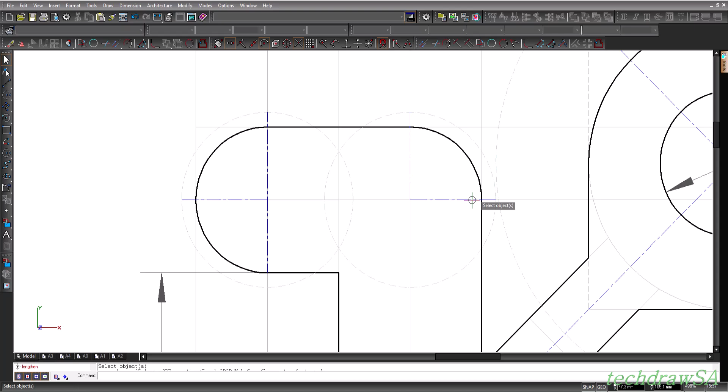And notice on whichever part of the line you click, if you click it on this side, you will shorten only that part. But if you click on the longest end of it, you will be able to extend the longest end of it. Just be aware of that. Same here. So if I use the line length tool and I select over here, look at what happens. It's going to choose the wrong side.

Okay, so escape out of that, choose the line length tool and select the farthest end and pull it to where you want it. The same here again on that side, that one that I want to extend, I want to bring it back to there, and then I do the same on this side. That looks much better. Let's zoom out a little bit, and then I'm going to go edit, clear all constructions to see what my drawing looks like now.

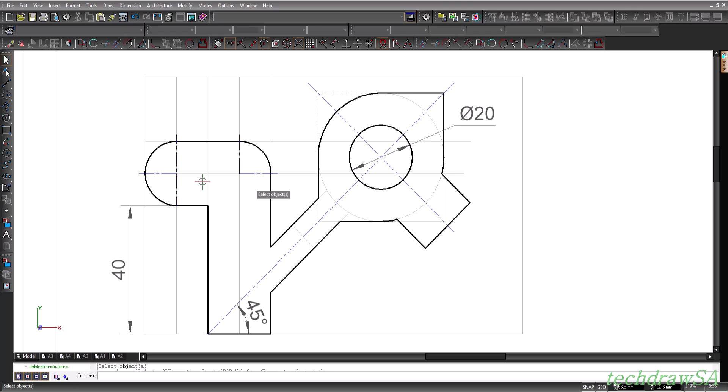Great. So what you can see here is that I've stayed within the perimeters that I have planned from the start. I have even got some space to work with. Here just my dimension is out of the initial planning, but we fortunately left that gap of 20 millimeters there that compensated for conditions like the dimensions. So that's why it's always a good idea to have that 20 millimeter distance from the border's edges. And then if you work out your drawing and your answer, you most likely will always be able to fit your drawing without any problem.

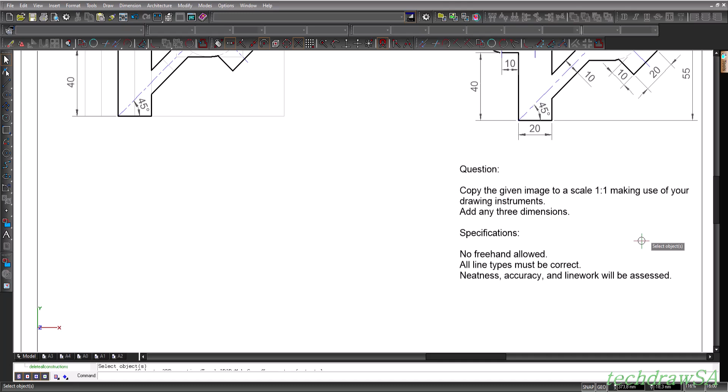Let's look at our answer and the example image and make sure that we have drawn in everything that we needed to. So we've got 3 dimensions, we've got our constructions, we've got our center lines. Let's just check the question here. So copy the given image to scale of 1 to 1. We've done that. Make sure you're using your drawing instruments. Add any 3 dimensions. And the specifications, no freehand was used, all line types were used correctly, and our neatness, accuracy, and line work should be fine. So we have hopefully achieved all of the outcomes of this challenge.